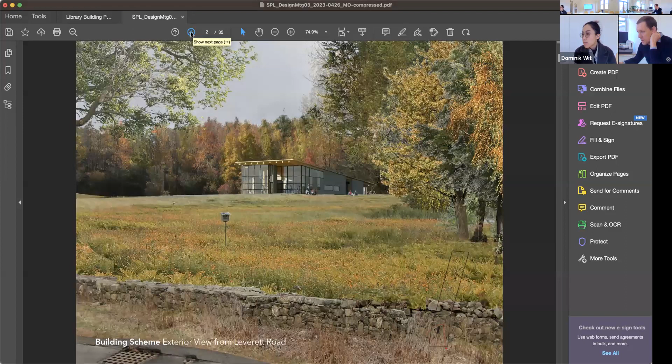Great, so really what we wanted to do today is, as Matt said, give you an update on what we're going to be submitting. We just have this image again as reference, we can come back to this if we wanted - which we showed you last week, the building view from the exterior from Leverett Road. Moving through to the plan, we had a great meeting with Mary Ann last week, where we spoke to a few little design revisions, and we've included them now, so I'd like to present them.

Generally, the building footprint and scheme has not changed, but we have made some tweaks here. The major change was really looking to reduce the size of the lobby, to make it a little more efficient, but also consider the opening to the meeting room and enlarge that a little bit. So you can see here from the lobby, we have reduced the width now - the clear is 12 feet from the southern wall to the north wall. Previously we had the structural columns exposed. The grid layout has not changed, and again the building footprint and roof has not changed in size, but we've finessed this lobby space.

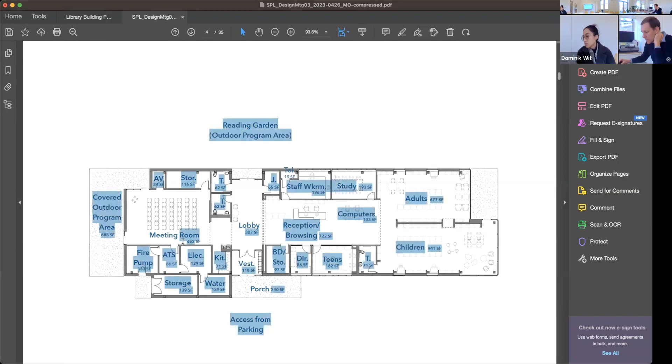Dominik, I think the label actually for the meeting room is not correct in terms of area. That one is off, because I think we resized it, so it's like 702 square feet now. Got it. So that's a typo, then I have to update that. So then working to the reception.

Working through the rest of the building, very similar layout. Some of the numbers have tweaked a little bit. The staff workroom has increased to get us close to that 200 square foot requirement.

That was pretty much the changes that we were discussing. We have increased the condition of this central spine wall, which is housing shelving to allow for additional collections. And we can go over those numbers with you on subsequent pages. So we're much closer with collection storage.

We were also looking at counts here at what were formerly the study carrels, and we have numbers, Marianne, where this would be a low shelving unit instead of study carrels. So that has helped us a lot. I'll present those numbers to you as well.

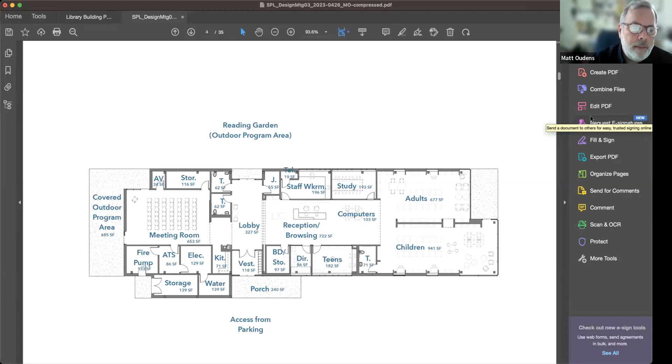The door is a little bit tucked around the corner, so it's maybe a little harder to monitor than if it was at the end of the adult room. I suppose we could look at that, and it would still be a way for kids to get outside. They just have to go through the pass through and the shelving wall to get through the adult room to get outside.

Marianne, I don't know if you have a feeling about that. The only thing I have to say is, I also had somebody come to me and request access to doors for children and families through the children's room. I think the adult room is pretty crowded, and it works there. Children who would be endangered by going outside should always be supervised by their own adults, by their parents or other caretakers, in a public library setting anyway. And it's going to be a big municipal level door that a tiny little child wouldn't be able to operate on their own anyway, right? So I think I'm probably okay with it there.

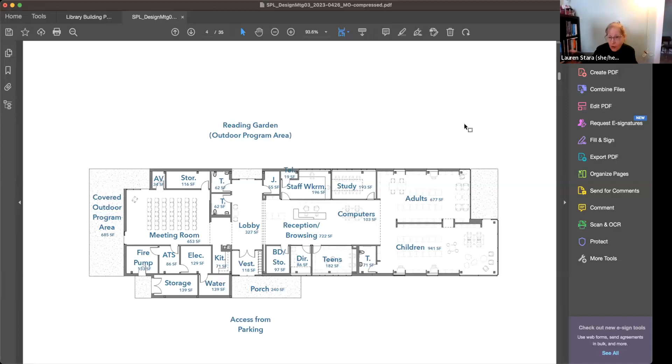Thanks for that, Stephen. Lauren? Just one more thought about the Library of Things - I'm assuming that wall between the staff workroom and the main service desk is glass, and some libraries are putting shelves inside the staff workroom with glass on the outside, putting the actual objects there so people can see them but can't get at them, and then they have the card system for taking them out. That's just another idea. Yeah, that's a good idea.

If there aren't any other questions, we can move on. Thank you guys for being really responsive to my comments last week, I'm happy about that. Glad to hear it.

Excellent, we are now looking at a reflected ceiling plan - this is the ceiling condition throughout the whole library. The light blue again shows a drop ceiling condition over this central zone, and then we also have that condition over the threshold into the meeting room, picking up these other miscellaneous spaces. So the vestibule lobby would be open to the roof structure and roof decking, the meeting room as well, and the adults and children's areas.

So the way we've laid out the structural elements allows us to get mechanical ductwork and other services, fire sprinklers, to serve those spaces up high within the structural purlins. So you create a virtual ceiling with the structural purlins, wherein some of these services can be nested up in that zone.

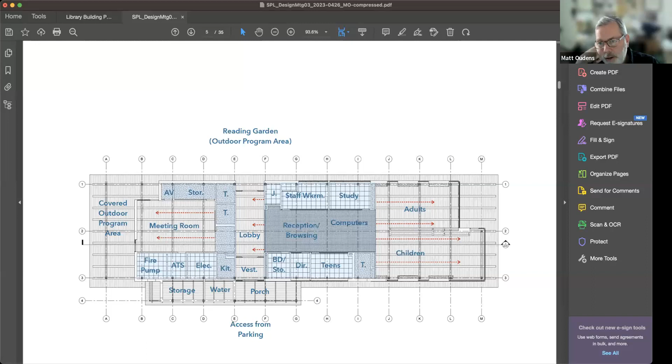I think in the next phase as well, it would be our intent to show some interior views as things develop, so it's something we can continue to study and give you guys a sense of before we go too far down the road. We also have our lighting consultant doing daylighting analysis and studies for us in design development, so that's something we can ask them to model for us, and we can find out exactly how much natural light we're getting there, and see if there's anything we can do to maximize it.

Any other questions for the ceiling?

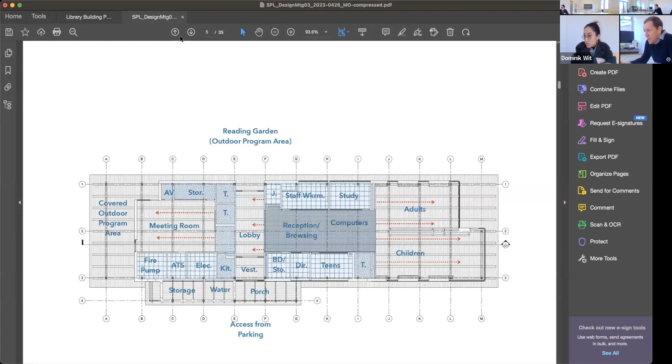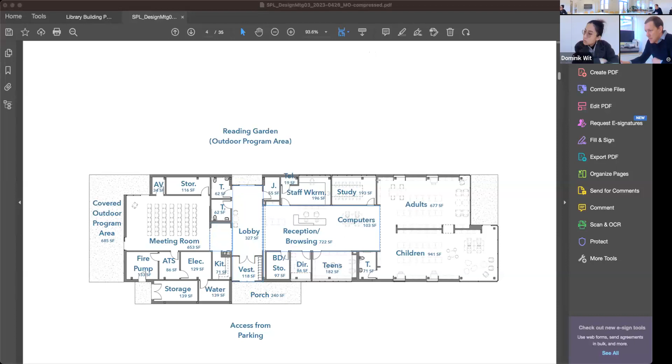I wanted to go back to the plan just to quickly speak to some floor finishes. It's a slide I'm going to put in and send out to you - I don't have it in the set right now, but I just wanted to explain quickly because I think it's pertinent that we would consider tile to be in these spaces that you see here. I don't know if that's the best color.

So as you enter the vestibule, there would be walk-off mats. The lobby would have tile that continues into the bathrooms, and you'd have a tile condition at reception, browsing, and the threshold into the meeting room. We would consider resilient flooring for staff areas behind here - it's a more forgiving surface if you're standing on it for long periods, something we commonly do. But tile is hard wearing and great for the winter months as well. The walk-off mat cleans your shoes well enough no matter what you're traipsing in at entry. This is kind of a common strategy we use for these spaces.

When you say tiled, are you saying VCT or ceramic? No, tile - like it would be a porcelain tile. We've used a product that looks a lot like bluestone or slate. It's a high quality tile floor. Okay, thank you.

Moving into adults and children's, these would both be finished with carpet. The family and staff room would be tiled again, but adults and children's would be carpet. Staff, workroom and study would be carpet, as well as teens and directors. We would potentially go with tile or resilient flooring in the book drop or storage room. We would go with exposed concrete in the janitor closet, and all these mechanical spaces would be exposed finished concrete, but we wouldn't put any additional finished material on those spaces.

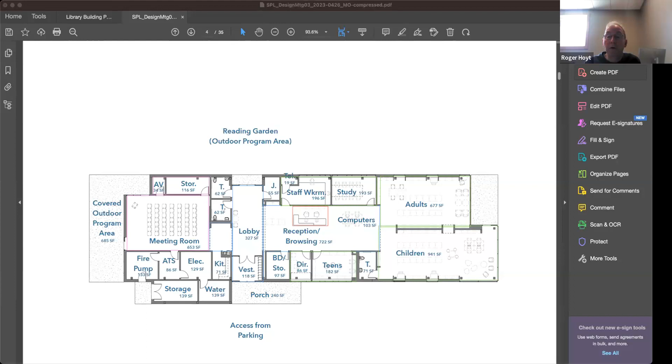I've got one comment. With all the various options of floor finishes and such, the cleaning equipment, let's probably not consider reducing that janitor's closet or storage too much, because you'll need space for that equipment. Otherwise it ends up in the electric room. Yeah, that's a good point. Definitely ample supply for cleaning products and a mop bucket and vacuum, maybe a floor scrubber if you've got tile or something. We'll work with you definitely as we get more into it, as to all the storage requirements.

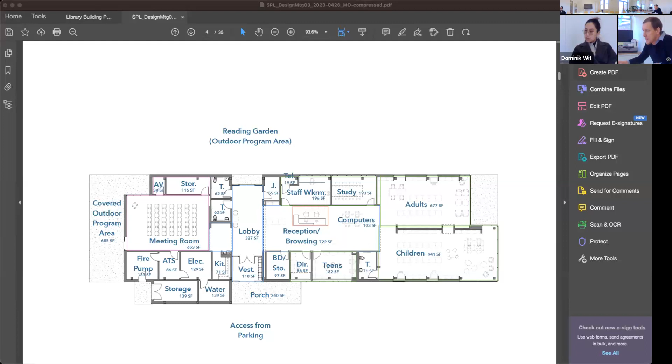Dominik, I don't know if you have an updated program summary or not. I do, yes. Do you want to jump to it? Well, just go ahead and move on to the next thing. Yeah, I'm just mindful of time.

So this is a section showing, again, similar to one you've seen previously. This is cutting straight through the middle of the building, north to south. So you see the meeting room, the threshold condition with the drop ceiling, then opening up to the lobby. Reception browsing is a 10-foot ceiling condition, and then opening up to the children's and adults behind. I'll send this to you. You see the PV on the roof as well.

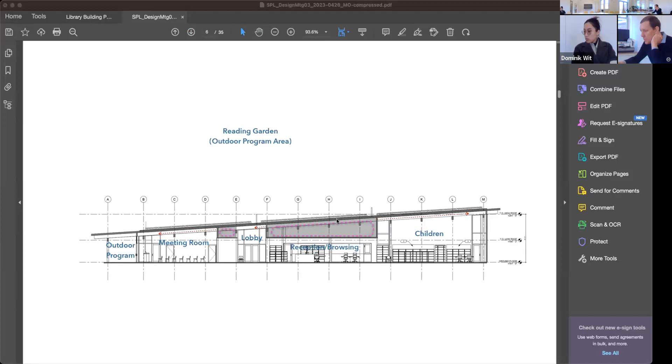We have some exterior elevations that I wanted to show you, where we're starting to think about the fenestration and finish materials. Here we're holding onto a slate shingle as the main finish, but Matt will talk to this further on in the presentation. So again, here it gives you a sense of all four sides of the building. These will be in the set for you to have a look at with more detail.

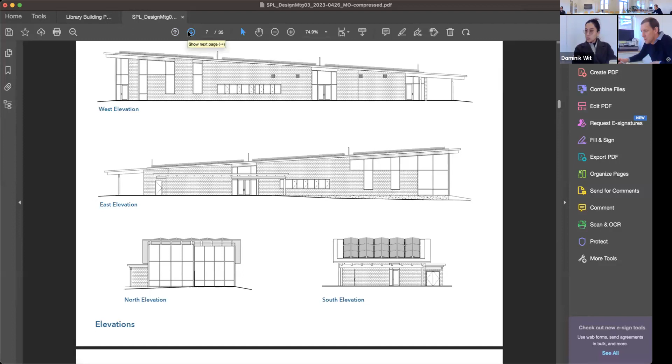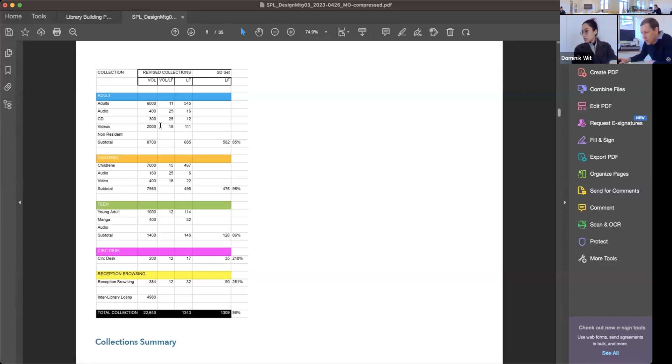I wanted to give you a collection summary. Marianne, we've gone through the programming document again. Sure. Is this better? Yeah, thank you.

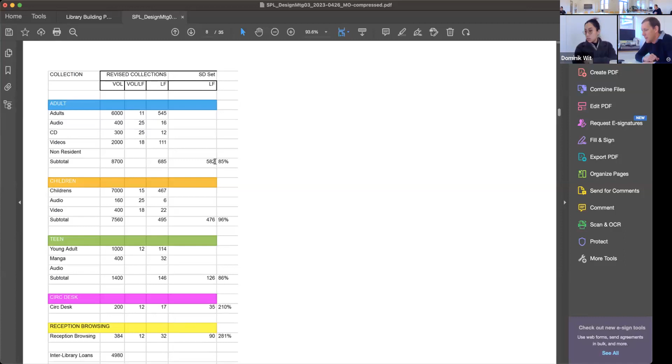So looking at linear feet requirements for adults, we have 685, and we're currently at 582. If we populate those study carrels with low shelving, like 3-high shelving, and the perimeter shelving, we would max out to 7-high. So that puts the bottom—this is a question to you—we normally initially specify 6-high shelving at the perimeter for adults, but you can max out to 7 depending on the exact needs of certain collections and the spacing between shelving. That 7th shelf would be 6'6", so it would be overhead. It could be supplemented with small step stools that you see commonly in some libraries. So that would be one way to really maximize your collection for adults, and you can see there we're at about 85%.

Before I move on, Lauren, do you have a comment?

How far off the floor is the bottom of the first shelf? And is that 6'6" to the top of the top shelf or the bottom of the top shelf? It's to the bottom of the top shelf, and the first shelf is around 6 inches, so it's 4 inches plus the shelf edge. So it's 4 inches, and then another 2, so you're looking at about 6 inches off the floor to start with.

So I wanted to mention that that is our consideration for adults. I think elsewhere throughout the program, Marianne, we're meeting requirements now, which is great, looking at the numbers that you need.

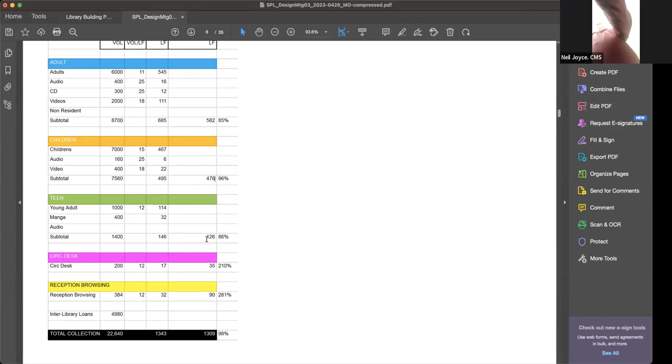So children's is 476 against your 495, so we're around 96% there. Teens, we're a little under, at 126 against the 146. We could look at that a little more as we move into DD.

Circulation desk, we have ample, so we can pull back a little bit to what you would like to see. Reception and browsing, you have 32 that you would like. Currently we have 90, so we can reconsider how that lays out. In the aggregate, we're about 98%.

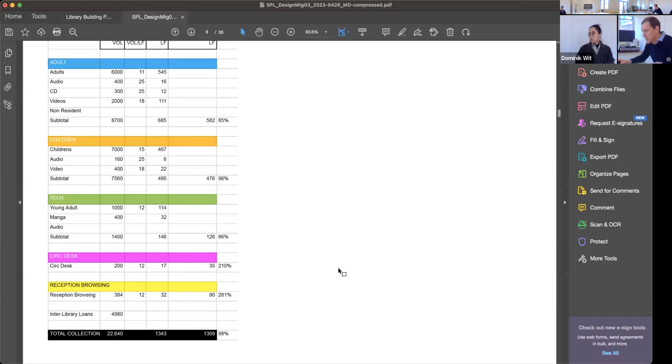Which is excellent. So I wanted you to have this and scrutinize it, and you can get back to me with questions, Matt. In the interest of time, if we move to the program square footages.

Looking at total gross building, we're at 5,971. You see that number here against the initial program of 5,428. We have reduced the lobby condition. You can see that we're still up a little bit.

Adults, we are at 677 for the collections itself. You can see here overall in adults, considering all the programming, we're just under. Teens, we're very close. Children's, we're just over.

The community meeting room, which I need to revise that note, we're actually at 712 square feet, Mary Anne. I know that was under before, so we've brought that up now. We're very close, just over the community programming. And staff, we're just under, considering some of these spaces.

Matt, I don't know if there's anything else you'd like to highlight. No, but I do want to double check a couple of these numbers, because I think that reception browsing number, I think is off. And the adult collection number also, I think, is off.

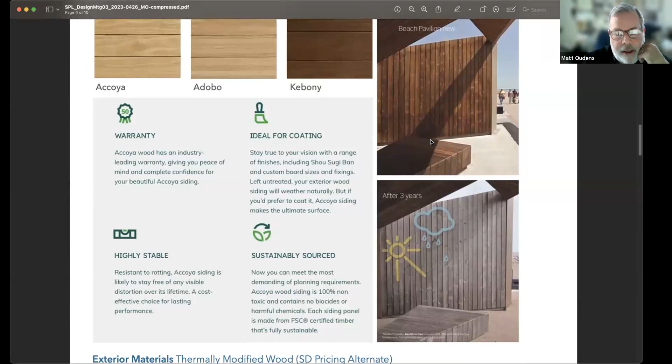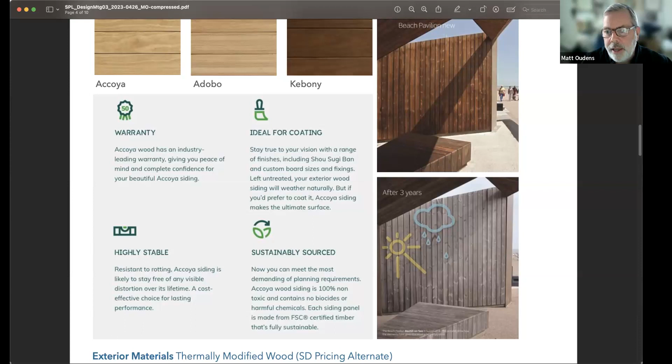So an alternate to this, and this is a product that we are researching for a couple other projects, there's a family of products out there that are thermally modified woods. There are three or four manufacturers that we know of: Accoya, Adobo, Kebony, there's one other. Basically what they do is there's a treatment of the wood where it's thermally treated, which makes it a much more stable material and resistant to rot and pest infestation.

They have different warranties. Accoya comes with a 50-year warranty, which is pretty remarkable for a wood product. Kebony's warranty ranges from 25 to 30 years, depending on which product you specify. So we would need to do some more research.

The images on the right show how it is a natural wood product, so it does weather, but it doesn't deteriorate. It's not susceptible to rot the way that a typical wood siding would be.

It's also worth pointing out that the installation of siding on this building, whether it's straight up Alaskan yellow cedar or a thermally modified wood, is going to be done differently than it would be on a house. It's going to have an air gap behind it.

It'll most likely be a rain screen system so that you're getting some convective air behind the wood siding so that it dries out. At a minimum, we would want to have a breather layer, like a cedar breather layer. But even beyond that, we tend to use strapping to create a cavity behind the wood.

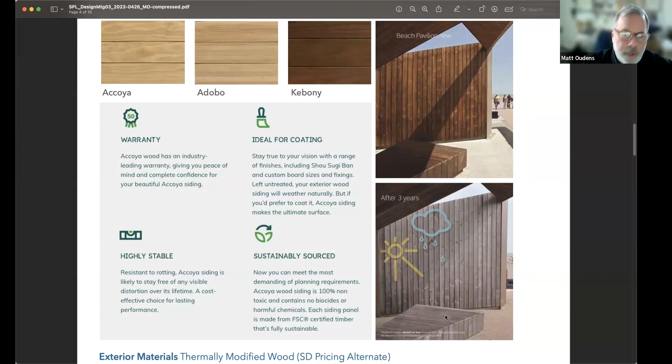You can even do an open joint wood system rather than shiplapped or tongue and groove, and that really just allows for venting of that exterior skin. It's really just serving as a rain screen.

We're going to price this as an alternate. It's more expensive than just the stained Alaskan yellow cedar siding would be, but it significantly reduces your maintenance costs over time. A 50-year warranty is pretty significant, so I think we'll want to evaluate that.

And then along those lines, another option that we're going to have them price, again just so we understand the relative costs of these, would be slate shingle.

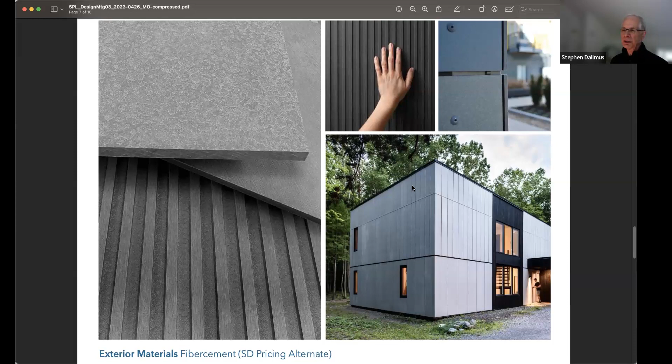I would just like to add that if you use slate as siding as opposed to roofing, I would venture to say it's a 200-year life. Yeah, it could be, that's true. It doesn't get the weather that it does on a roof, for sure. And the Vermont quarried slates are some of the hardest slates that just seem to last and last on roofs.

I would just like to say that the slate comes in purple, and that is very exciting to me. Are you going to have purple shells like West Tisbury? Everything is going to be purple. We did not pick those purple shells, just for the record. There's not a purple thing in my house, but I do love that purple and green slate. I was looking at purple marmoleum - we did a kitchen renovation here at my house, a mid-range one, and we did a marmoleum floor, not purple. They did purple marmoleum in West Tisbury, along with lime green. Lauren, I don't know if you've noticed on a sunny day in that children's room with the lime green floor, when the sun streams through the windows, the light reflects off the floor and turns the white ceiling green. Holy cow, it is really green. I bet the kids love that.

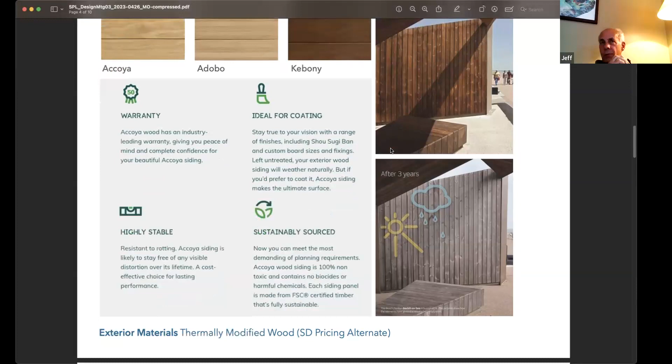Have you guys used it? We have used it, although not in a while. It's not our preferred material, frankly, it's got a very commercial look to it. We have a couple of libraries, Walpole and Northborough, I believe, that are both fiber cement. They're from more than a decade ago and they still look the same.

We haven't used it in a while. It's one of those materials that gets considered a lot and then ruled out by a lot of our clients. The last time we did it was on a municipal project in Maryland, probably 15 years ago at this point. We used it a couple of years ago in the student union at UMass. It's holding up, it's a different look.

I think we'd have to go see some of these different products in real use to make you comfortable with it. And then we have to see the price difference too. We have to see the pricing, a lot of things are going to change once we see it. I do think a wood building can be maintained. I'm guessing wood will be the least expensive of these options, although with fiber cement, because the unit sizes tend to be bigger, the labor costs go down, so we may find that fiber cement and wood aren't that far off from each other.

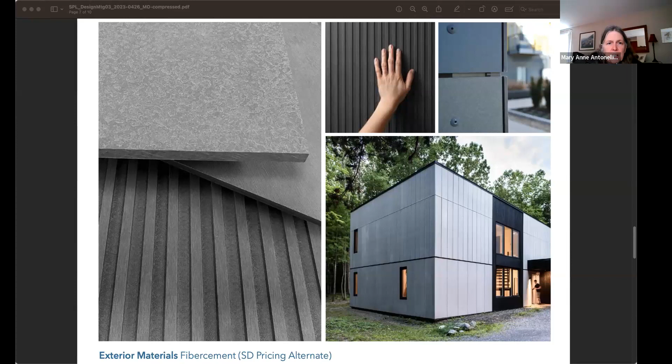23rd and 31st. Yes, great, thank you, and you'll let Neil know. Yes, okay, alright, terrific. Neil is here still? Oh no, he just left. He texted me that he was going to leave early, but I didn't check to see if he actually left.

Well, thanks everybody. I think we're making good progress, and you'll keep us posted on your end, Dominik. If that pricing set comes in early, maybe you could just let me know. Absolutely, yeah, will do.

Fingers crossed. Are you going to send the pricing estimate set and documents out? Correct, both the drawings and then the estimate when you get it. Will you send it to us before the meeting? Yes, for sure, I would like to issue the set when we do the cost estimate, so first thing next week I plan on getting that to you guys.

I know we'll be up against it for this Friday, and I'll make sure you guys have it in hand as well. I'll send this to you as well, what I presented today, so you can review some of these pages we kind of flew through a little bit.